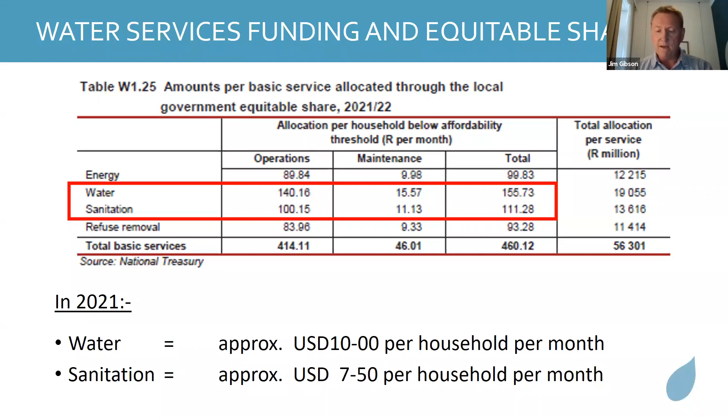One comment from my side is that this is calculated on a per capita basis, but I think the engineers in the room will probably agree with me that it's not necessarily the number of people that dictate your costs, but rather the nature of your infrastructure. For example, groundwater versus surface water, and I'll come back to that later, and the various options of sanitation technology. But our Division of Revenue Act provides a universal number based on the population served rather than the infrastructure used. Next slide, please.

So this is just a slide to give you an indication of all of the things that we were involved with. While at face value, rural operation and maintenance may seem to be a very simple job, there's a lot going on in terms of the core business processes of abstracting water and doing the various treatment and transmission processes to deliver to customers, and then the sewage and fecal sludge management activities that follow on from that. And then, of course, all of those support services that have to be provided to make sure that things keep working. The next slide, please.

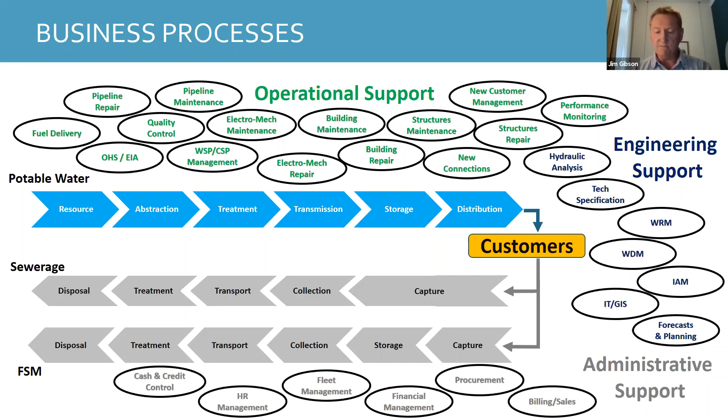So this was our scope of work in Chris Hani. We had 486 schemes. Some of them were regional schemes, some were group schemes, but the majority were standalone. 709 villages, as you saw in that previous picture. There were 8 towns, which were relatively small towns, but they were formal urban places. A population of just under 400,000 people.

And being an electromechanical engineer, I can't resist saying that 426 pump installations were part of our scope of work. And I think that is an important consideration, which I'll come back to as well, in terms of how that influences the work that's required, the skills that are needed, and the costs that will be incurred because of the nature of the infrastructure.

We had quite a big staff, so at community level, we had that number of operators, administrators, and board members you see there. And on the right-hand side is a very simple representation of our own organogram as the support service agent. Our workload did vary as various schemes came on board, but we had between 30 and 50 professional staff that supported the community-based operators, typically with the high-level skills that are required. Next slide, please.

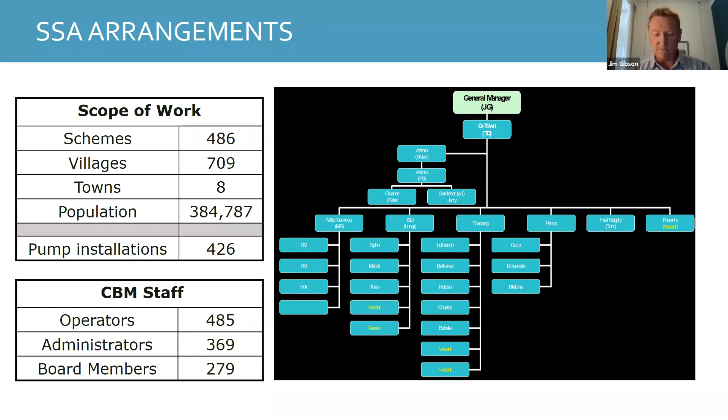So this is the kind of reporting that we put in place. This was very important from a management perspective to allow myself to keep a finger on the pulse of what was actually going on. And we tried to align our reporting with the key norms and standards that I mentioned earlier that were set in 2002.

So we monitored the E. coli count in water, along with other quality parameters, but the E. coli count was the most challenging, because this required us to make use of an accredited laboratory to do those tests. And so it became quite a big cost component of capturing the sample every month, which is one of the norms and standards that applies in villages that size, one per month sampling, sending it off to the lab and getting the results back.

We also had a system of monitoring the performance of the community-based organizations we were working with. As you saw previously, there were a large number of people involved. And like any large grouping of people, it requires management. We couldn't just allow it to operate on its own. So we had performance standards, particularly the submission of reports that we required from these community-based organizations.

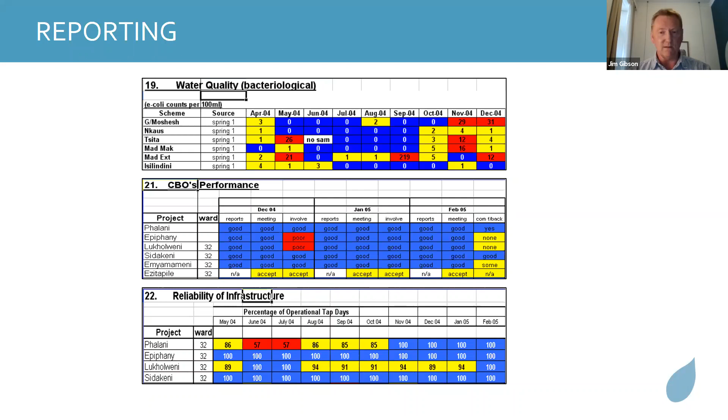Next slide, please. So this is what we achieved. We were quite proud of our achievement in Chris Hani. We achieved water quality compliance of 98%, and our continuity of supply was 96, and I think both of these were above the norms and standards that were set. As you can see, it was not quite so successful in Alfred Nzo District Municipality, ANDM, which is another area where we did a similar contract prior to Chris Hani.

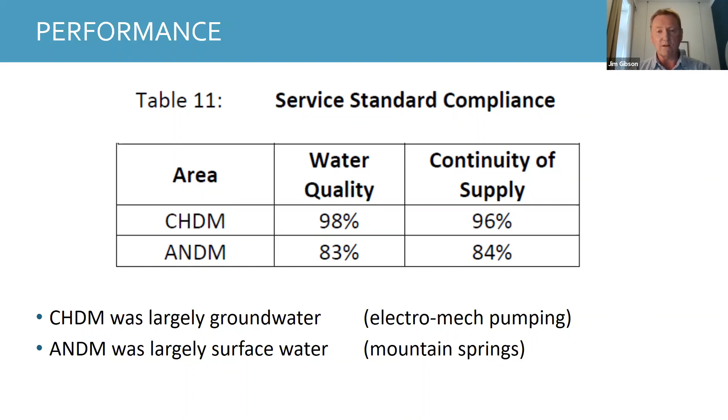And our feeling was that the reason for the higher water quality in Chris Hani, so full marks to the hydrogeologists in the room, was that it was largely groundwater supplies using electromechanical pumping systems. And Alfred was largely surface water, mountain springs running down from Lesotho in this particular case. But obviously it was much more difficult to control water quality in that instance. But over the years, we did introduce regular chlorination where problems were identified. Next slide, please.

What we did find was that when people complained, regional schemes were more likely to receive attention because they obviously had a bigger political impact, if I can put it that way. And so they were more likely to be addressed when problems occurred, where standalone schemes often were neglected. Next slide, please. So this is just a way of representing the challenge we faced. Next slide, please.

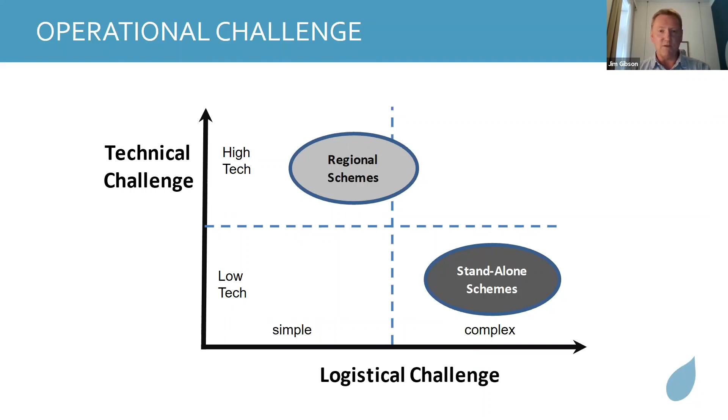So we had a wide distribution of types of schemes. We had many small standalone schemes, which presented quite a logistical challenge. In many instances, there was no electrical power, so the pumps were powered by diesel generators or direct diesel engines. We had quite a few intermediate group schemes, and then we had a few high-tech regional schemes serving multiple villages, up to 100 in the one instance.

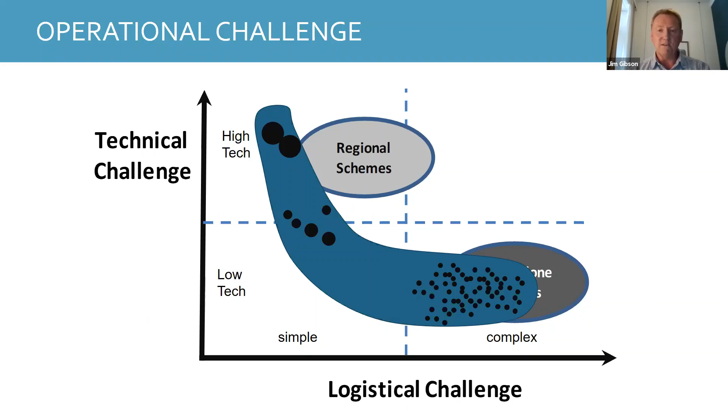And one of the challenges we faced, next slide please, was that you have to have quite a wide range of capabilities within an organization if this is the technical and logistical challenge that you face. And we were often asked what the solution would be to be able to address this.

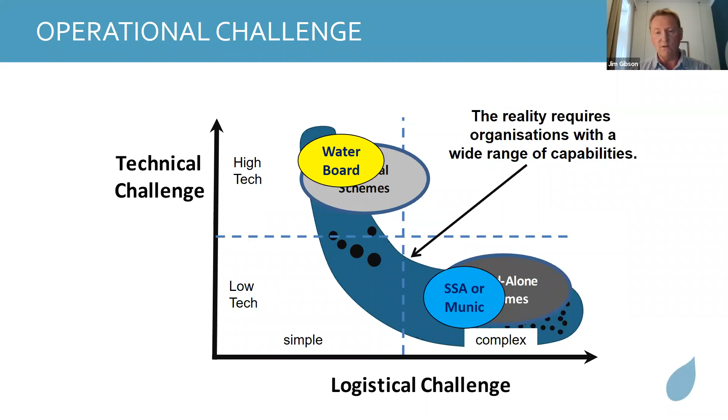And although we did both of these, because that was the arrangement that was put in 2001 and 2005 on the two contracts, our feeling was that perhaps water boards, bulk suppliers, were more suited to the bigger high-tech schemes, but support service agents or municipalities would be more appropriately positioned to handle the logistical challenges of the many dispersed schemes. Next slide, please.

So this is just a representation of the economies of scale that one might get if you go for regional schemes. But my own personal feeling is that one of the hidden costs of regional schemes is this question of complexity. And in water services, my feeling is that this doesn't reflect as increased costs in terms of money, but rather in terms of service delivery failure.

So you saw our survey of the regional schemes, and in many cases, they had large areas that were dry almost permanently. And our contention was that it was complex to operate these, and you really needed a competent operator to ensure that the whole scheme was working at any given time. And that operational complexity is something that needs careful consideration when you make decisions around what size of regional scheme you might be considering building. The next slide, please.

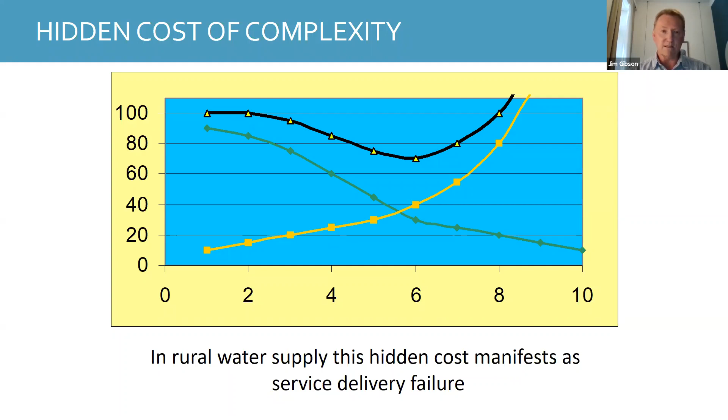So this is the financial outcome. I've escalated these numbers to represent in 2021 dollars. And as it so happens, my vision was being blocked by one of the pop-ups. The current value of what it was costing us to deliver services in Chris Hani was $8.40 per household per month, sorry. And that should be per month. And in Alfred Nzo, it was $3.50.

And so my comment here is that while the groundwater systems produced a better quality water, this is where the rubber hit the road in terms of costs, that it was much, much more expensive for us to maintain the groundwater systems because they typically required electromechanical equipment to pump the water, whereas the surface water schemes we had ran by gravity from reasonably close by high ground. Next slide, please.

So there's just a representation of that. We did various cost modeling as an aside to this assignment, and you can see the yellow bars are actual costs. And this illustrates the relationship between the actual cost and the equitable share that was provided at that time. And in Alfred Nzo's case, the actual cost was much, much lower than the equitable share. Coming back to my earlier point that the costs are dictated by the nature of the infrastructure rather than necessarily just the number of people that are served.

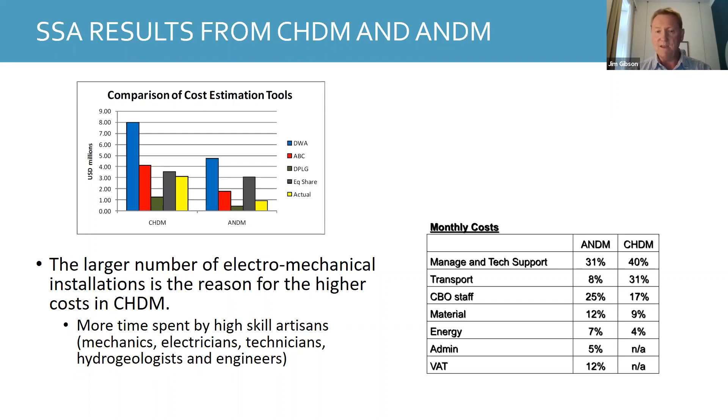So as a result of all of this work, the one thing that came out of it was that we had to submit monthly fee accounts that detailed everything that we spent. And so we developed a very, very detailed database of what it actually costs to run these various schemes. And on the basis of that, we were asked by some other municipalities, including Chris Hani, to do some modeling of what it would cost for their whole service delivery responsibility.

And what you see at the bottom there is our total cost estimates in both the instances of these municipalities exceeded both the equitable share, that is the grant funding from the central fiscus, and their tariff collection added together, which is quite disturbing because the equitable share is only supposed to provide for those that are indigent, and the rest should be made up for from tariffs that are collected. One of the other problems is that municipalities don't always allocate all of the money to water services that is allocated against that calculation that I showed earlier.

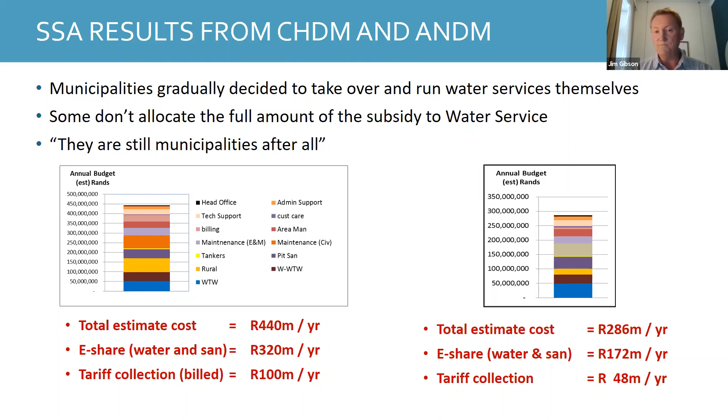But at the end of the day, they are municipalities, and they obviously want to behave like municipalities. But the reality is that many of these big district municipalities that run rural water supply in South Africa get maybe 80, in some cases even above 90% of their funding related to water services, just by the nature of the powers and functions that they have. And therefore they are, in my opinion, de facto water utilities. But their mandate is as a municipality, and therefore they have to continue to provide those other services. And the only source of funding they have is from their water services equitable share. Next slide, please.

So that's just a representation of the split of the costs that we had when we did it for other municipalities. You see in some of these instances, the community-based organization costs were very low just because of the nature of how they were doing it. But this, I just want to illustrate that the human resource costs are high because you have to have these highly skilled people to run high-tech equipment.

And unfortunately, the nature of these pieces of equipment is that they do break down and they do require maintenance, and with disturbingly regular occurrence. This is the reality of operation and maintenance. It's relentless. The other thing that these graphs illustrate is this high plant and equipment cost, which is essentially that transport cost of keeping people on the move to be able to do the work where you have infrastructure that is dispersed over a large area. Next slide, please.

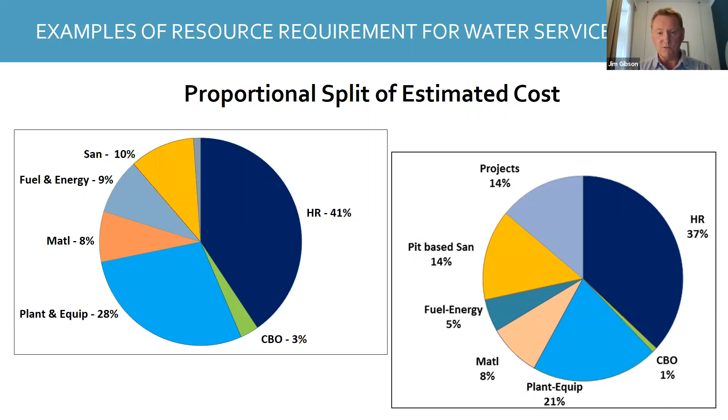So the finding from that was that even with these substantial subsidies that are available, it may still not be sufficient to run water services in these municipalities in South Africa that have inherited these areas that are the product of old apartheid planning. Our rural areas are where our greatest poverty exists, and it is indeed still a challenge even after 20 more years since 1994.

The nature of the infrastructure and geography matter a lot. I think I've said enough about that. I won't belabor that point. And just to make the point that these cost drivers in rural areas can be quite different to what is normal in an urban environment. So taking urban experience and extrapolating that to rural areas, yes, if it's the only figures you've got, sure, you have to do that, but be very careful. They can lead to big discrepancies.

And my warning would be, if any place or any country is considering free basic service, while it may be necessary, be careful in the decisions you make, and don't lock in mistakes that become difficult to undo. Some examples of that are when municipalities took over from the support service agents, probably between 2010 and 2015. Many of the community-based workers became permanent employees of the municipality, and that pushed their costs up dramatically.

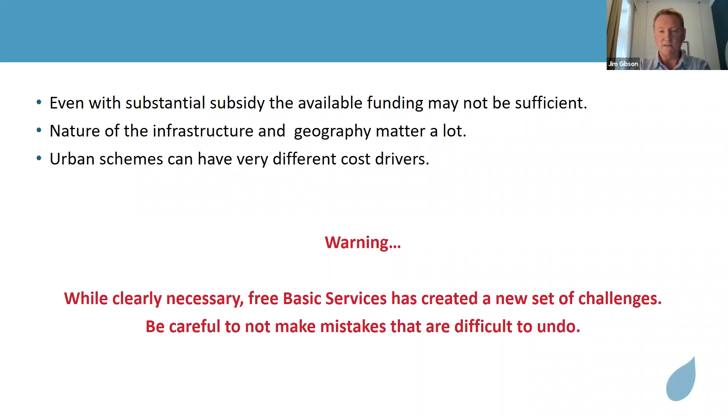This question, if the money is allocated as it is in South Africa on an unconditional basis, the municipality can decide whatever they want to do with the money. If they are a municipality or a different kind of organization, it may not go directly to the service that it has been calculated in respect of. Yeah, and as I said earlier, some of these municipalities are de facto water service utilities, but because of the mandate they have, they will tend to take that money that is unconditional and allocate it elsewhere. Next slide, please.

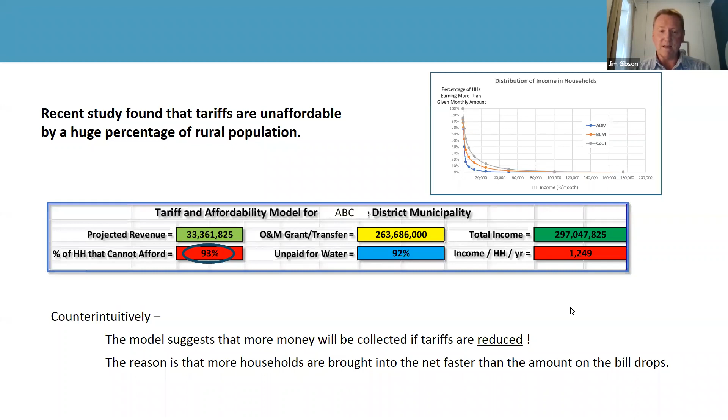So I'll quickly go through some experience we have when we compared some other experience in African countries. We looked at these various countries, and we asked questions around what operation and maintenance looked like, how it was done, and how successful it was. Next slide, please. So I won't go through all of these because they basically reiterate what I think I've been saying. But just to pick out a few, transport is a universal challenge in rural water supply. We have the problem that people make use of alternative sources, which obviously impacts on the revenue of utilities.

And community-based organizations really need support to be able to perform any kind of meaningful role in ensuring the sustainability of rural water supplies. But in our experience, when we were doing it as a support service agent, that role of the community-based organizations was crucial to our success in that local activities are by far best carried out by local people as long as they have the technical skills to do so. And they play a very important part in being your eyes and ears to alert you when higher level maintenance activities might be required. Next slide, please.

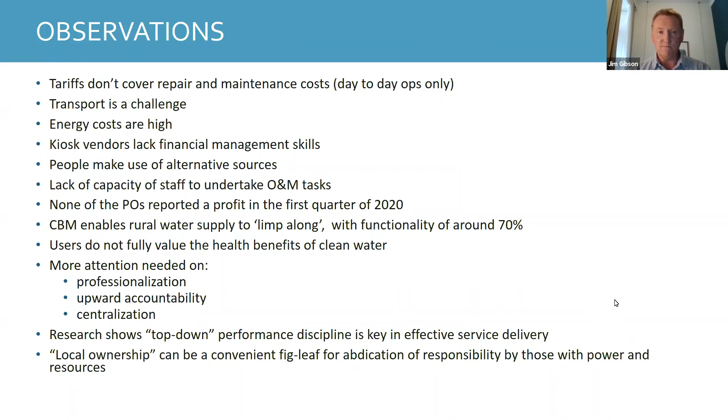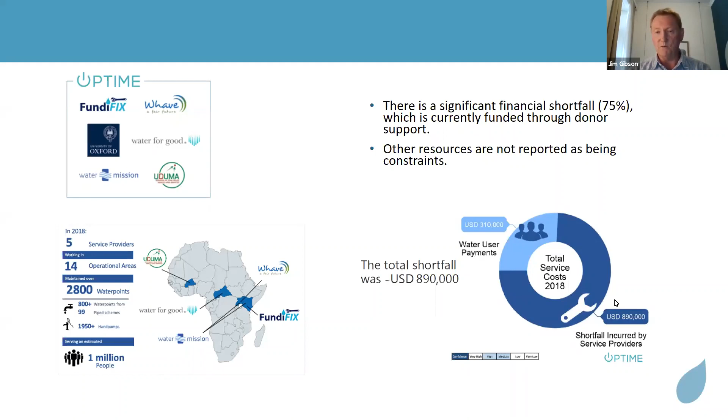This was an interesting piece of work that we found as we did this research. These organizations that are represented here work largely in Central and East Africa. And the point of this slide is that in their funding model, they find that, as you see there on the bottom right picture, pretty much around 75% of their costs still have to be covered by outside sources, which is what was basically realized in South Africa in and around 2000, and hence the introduction of free basic services, that it was just not going to be commercially viable for these rural schemes. Next slide, please.

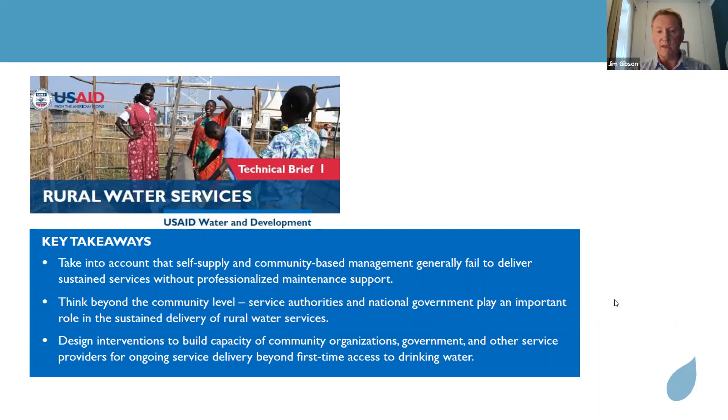Again, just to reiterate the points, this was a summary of some work done by USAID, and it basically makes the same point that community-based organizations can't really be expected to fulfill this role all on their own. And we need to think beyond this community level and look to local government and national governments for the role that they can play. Next slide, please.

So the big question for me is, what do we do if we have a service that has no fundamentally viable commercial proposition? And I think so much of the planning that is done in rural water supply has this as implicit. We seldom actually discuss it really. Although engineers and other project planners are asked to put in something about a financial plan, the truth is that it's never really given due consideration.

And again, it's assumed that there is some sort of implicit viability. And I think the evidence certainly around Africa is that this is not the case. And in fact, not just around Africa. I mean, in many places, water supply does not have this commercially viable proposition. Next slide, please.

So this is the way I like to represent it. If you have a challenge you face and your resources are far in excess of what the challenge presents, you don't have to think very hard. You can just dominate the challenge. And some countries in the world have this, where they have vast resources and they can just pay for what they need. In most places, good strategy and tactics are needed where your resources match the challenge more or less, and there you need good business practices.

But in so many places, particularly in rural water supply, the challenge far outweighs the resources that are available. In a military context, that results in no option but to adopt guerrilla tactics. And I think the water services equivalent of that is what we call firefighting. And we see that all over. And I would propose that a big part of that is because the challenge just so far outweighs the resources that rural utilities have. Next slide, please.

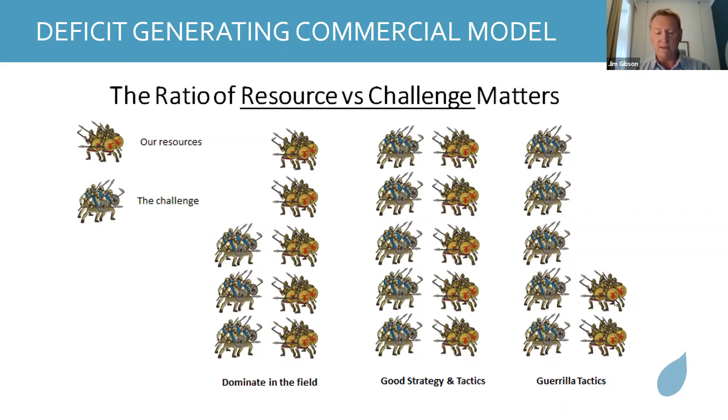So this is my summary. O&M requires large resources. I think I've demonstrated that. In many rural contexts, the resources are unlikely to be provided from tariffs alone because of this non-viable trading proposition. A colleague of mine asked me recently if allocating the subsidies will guarantee that it will work. And of course, I can't guarantee that, but I would like to think that I can guarantee that it will almost certainly not work if the resources are not available.

A controversial point on technical assistance, another illustration. If you look at a human being, no food for 3 weeks results in the person dying, no water for 3 days, and no air for 3 minutes. But if someone has been without food for 2 weeks, water for 2 days, and air for 2 minutes, what do you think is going to be their focus?

So doing things that address the food and water shortage aren't going to help much when somebody is struggling for oxygen. Without adequate resourcing to do the primary job that is at hand, many of the technical assistance initiatives that are undertaken are, of course, good in the long run, but they may not help these utilities in the short run and the challenge they face.